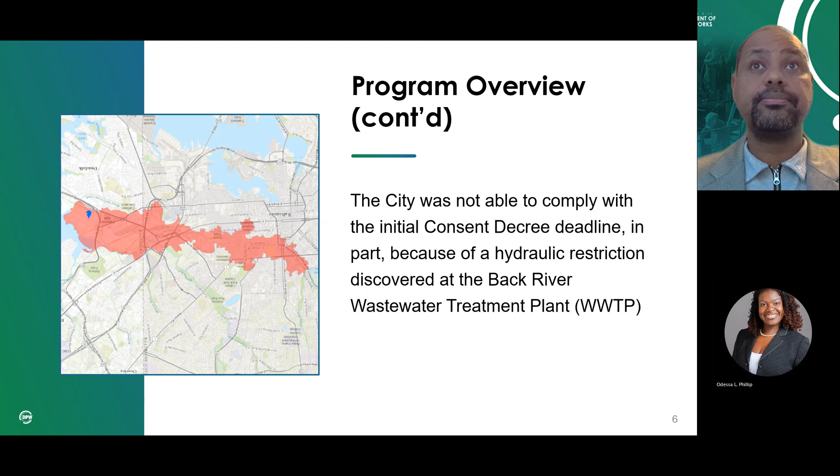So on October 10, 2017, a modified consent decree, MCD for short, was filed with the U.S. District Court. This modified consent decree established two separate phases. The phase one deadline was January 1, 2021. We are happy to say that we are essentially complete with phase one, with the exception of two projects that were delayed due to extenuating circumstances. And within this phase one, there were various projects to rehabilitate the collection system and reduce and mitigate SSOs.

Phase two will begin shortly, is in process, and is slated to be complete by December 31, 2030. And this also will provide additional reduction in inflow and infiltration, or I&I, while also upgrading the hydraulic capacity of our system. The project team for the MCD within the Department of Public Works, as you can see, is fairly extensive. These are the offices and the divisions that all play a part in making sure that the city of Baltimore is compliant with the MCD.

There are various program elements of the MCD, commonly referred to as paragraphs. What you see on the screen here are the key paragraphs or elements of the program. There are a few that I will highlight. The vast majority of the activity within the MCD is within paragraphs 8 and 9. Paragraph 8 is the elimination of SSO structures. Paragraph 9 is where a lot of the design and construction projects to eliminate SSOs are laid out or stipulated.

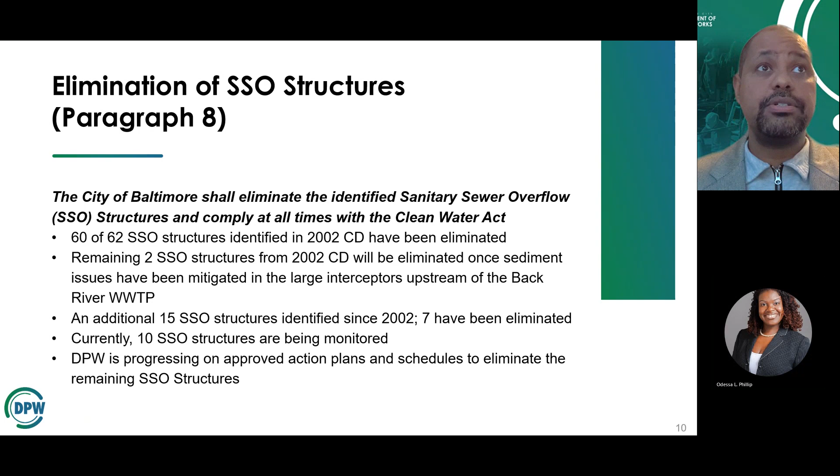So over the past 12 months, this is what we have been able to accomplish. The cleaning of the interceptor I just mentioned has been ongoing, and once this cleaning project is complete, SSO structures 67, 72, 152, and 154 will be mitigated/eliminated. It is very important to note that this cleaning project has been very active over the past 12 months.

Over 1,200 tons of debris and material have been removed from these large interceptors across a span of over 7,000 linear feet. So every debris, every collection of materials and hard packed sediment that we're able to remove directly translates to providing additional effective capacity in these interceptors.

We have also in the past 12 months begun post-construction flow monitoring, or PCFM, on SSO structures 135, 138, and 139. The elimination of these SSO structures is dependent on a project, Sanitary Contract 940, that we completed in July 2022. Since the completion of that project, these SSO structures have not been activated, so that is a very good sign that this project was successful in achieving its objective.

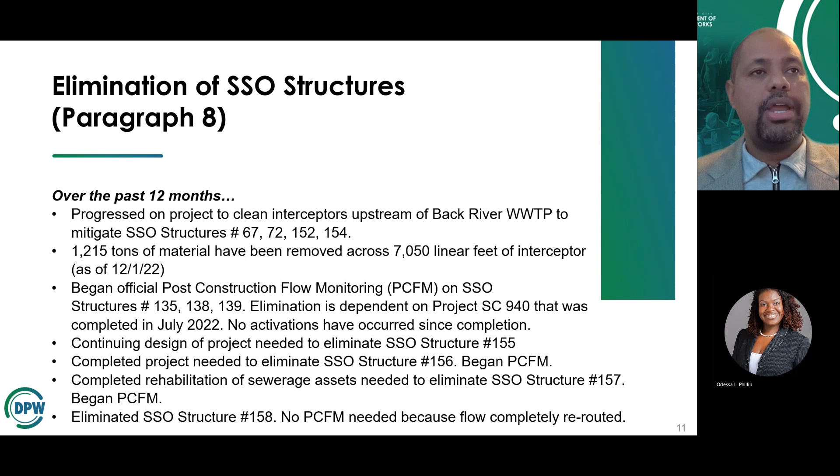We have also been continuing over the past 12 months to finalize the design of a project to eliminate SSO structure 155. We also completed a project necessary to eliminate SSO structure number 156 and have already begun the PCFM. We completed the rehab of additional sewer assets needed to eliminate SSO structure 157 and have also begun the PCFM there. And finally, in the past 12 months, we eliminated SSO structure 158. This particular structure did not require PCFM, as we were able to completely reroute the flow.

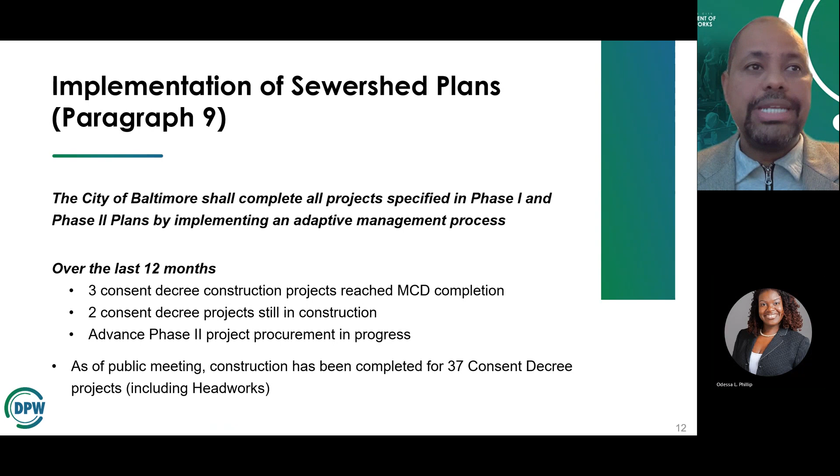The next key paragraph is paragraph number 9, implementation of sewer shed plans. Again, as I mentioned, this paragraph mandates the execution of various construction projects, and over the past 12 months, 3 consent decree construction projects reached their milestone or their completion date. 2 construction projects are still in construction due to extenuating circumstances, but we've also been able to advance some phase 2 projects in these past 12 months through an early procurement process. So as of today, construction has been completed for a total of 37 consent decree projects, including the headworks.

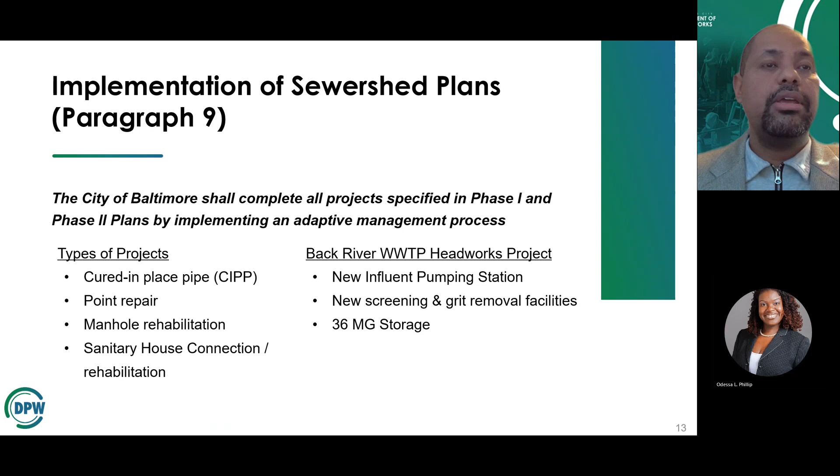The types of projects that are implemented for paragraph 9 include cured in place technologies, which is essentially, within a pipe that is deemed to be leaky or has an issue of I&I, sliding a sleeve through that pipe and renewing the life of that pipe through a cured in place pipe material. Also, point repairs are conducted, manhole rehab, as well as sanitary house connections to individual services.

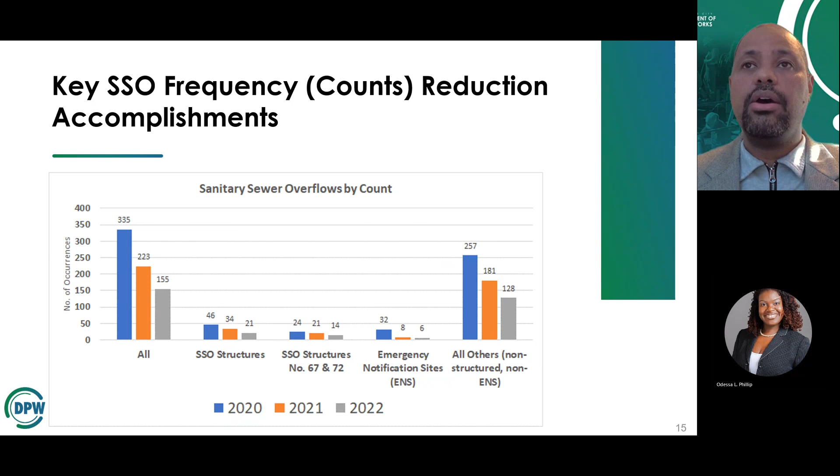So again, over the past 12 months, in paragraph 9, continued the implementation of the PCFM, and also continued the necessary analysis that will result in the completion of our phase 2 plan, which we will be submitting to the regulators this month.

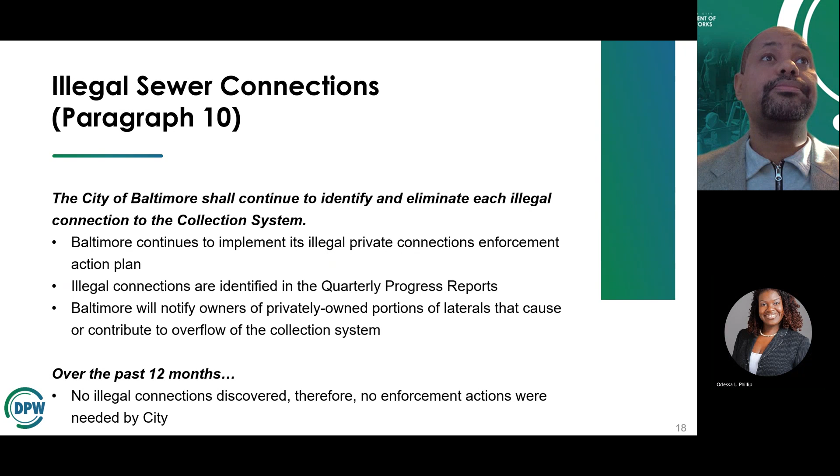Moving on to paragraph number 10, this is the paragraph that calls out the identification and elimination of the illegal connections in the collection system. Over the past 12 months, there were no illegal connections that were discovered, therefore, no enforcement actions were needed. Paragraph 11 is specific to the pumping stations, the inspection, repair, and rehabilitation of these pumping stations. Over the past 12 months, there were no overflows or no near misses that had to be reported.

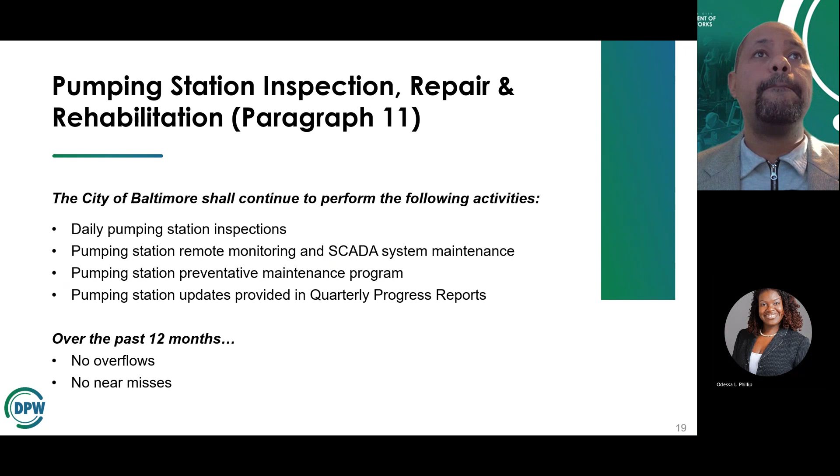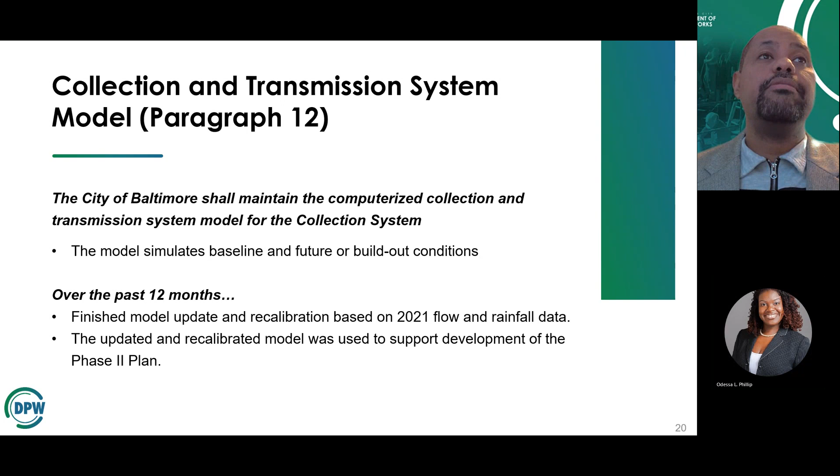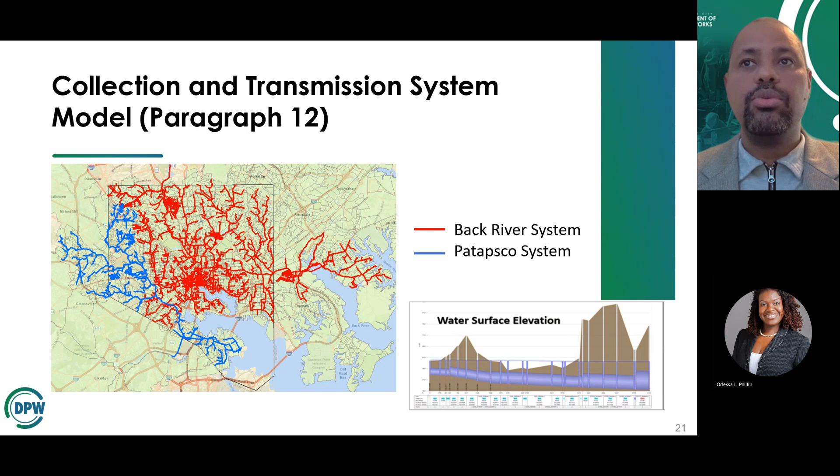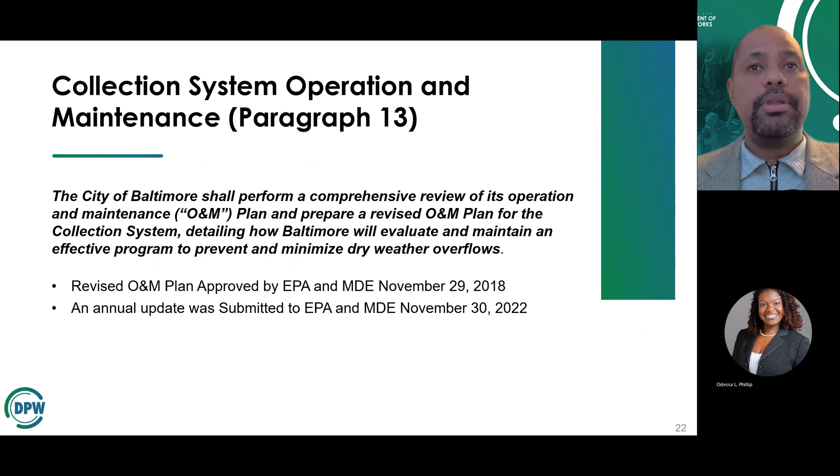Paragraph 13 is focused on the collection system operation and maintenance. And this program, the O&M program, is critical for the city to ensure that a lot of the distributed SSOs that I mentioned earlier are addressed. And we have a plan that is required to be updated on an annual basis. So over the past 12 months, we submitted to EPA and MDE the annual update for the O&M plan. We also publish on the website and submit to regulators the progress report for the operation and maintenance program.

In the past 12 months, 2.1 miles of sanitary sewer pipes were cleaned. Fats, oils, and grease, or FOG for short, was treated. 8.3 miles of pipe were treated for FOG, and 6 miles of pipe were treated for root intrusion. Again, these are all critical ongoing activities that the city is engaged in to help to reduce the occurrence of sanitary sewer overflows in the system.

But again, this is very critical for us to perform, but also in partnership with the public, so that various components to the sanitary sewer flow, such as the flushable wipes and grease and other things that contribute to blockages and issues are dealt with. And so there's a public education component to what we do to perform this O&M. Finally, we have a robust program that inspects and in some cases enforces grease control from food service establishments. And throughout 2022, over 1,600 inspections were conducted at these food service establishments.

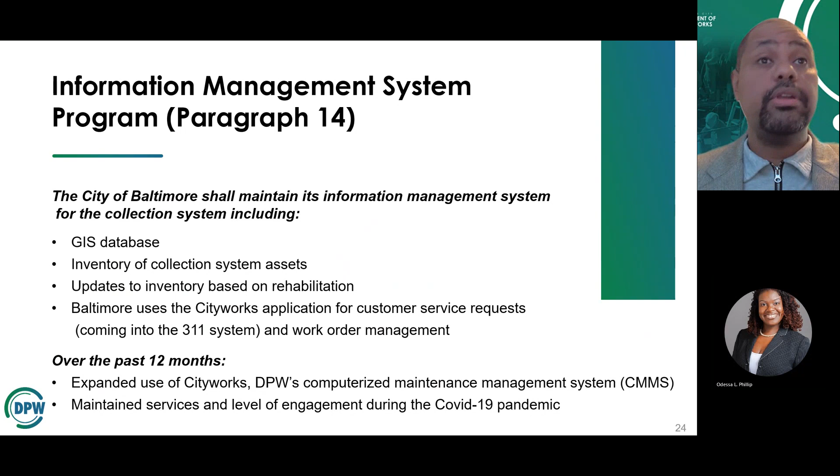We also use a computerized maintenance management system, or CMMS for short, that is used for the execution of work orders. And CityWorks is an industry standard that the city has been using for several years now. And in the past 12 months, we have expanded the use of CityWorks and maintained a level of engagement even during the COVID-19 pandemic.

Paragraph 15 is specific to addressing sanitary discharges of unknown origin, or SDUOs. And over the past 12 months, let me back up. The SDUOs are discharges to the storm system, which is separate from the sewer system, where it is unclear or unknown where that sewage source is from.

So once these SDUOs are identified, there is a process for source tracking. And then once the source of that discharge is identified, there is a process for abating it. And so over the past 12 months, 10 SDUOs were discovered, 6 were abated, and 12 from the previous year were also abated. So we have 4 SDUOs outstanding.

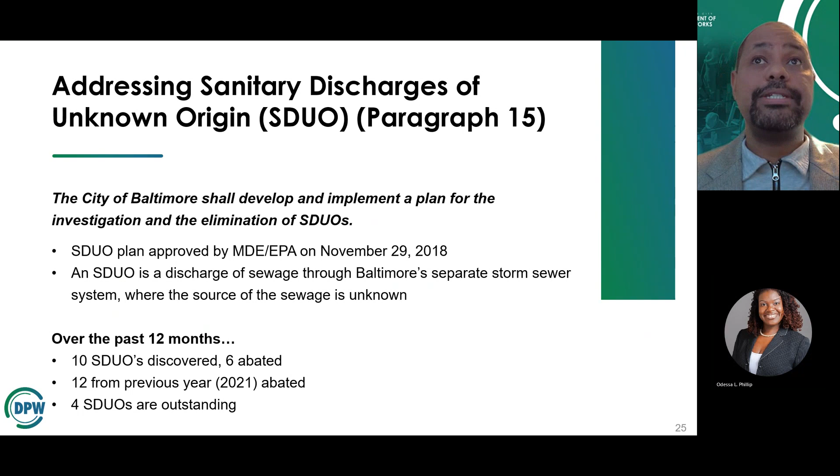Paragraph 16 is for the revised emergency response plan. And this ERP also includes a requirement for annual training for DPW O&M staff. And that training was implemented. And we are currently in discussions with the regulators for some final punch list items, if you will, to the ERP, so we can get final approval. And this revised ERP was submitted on September 15 of 2022.

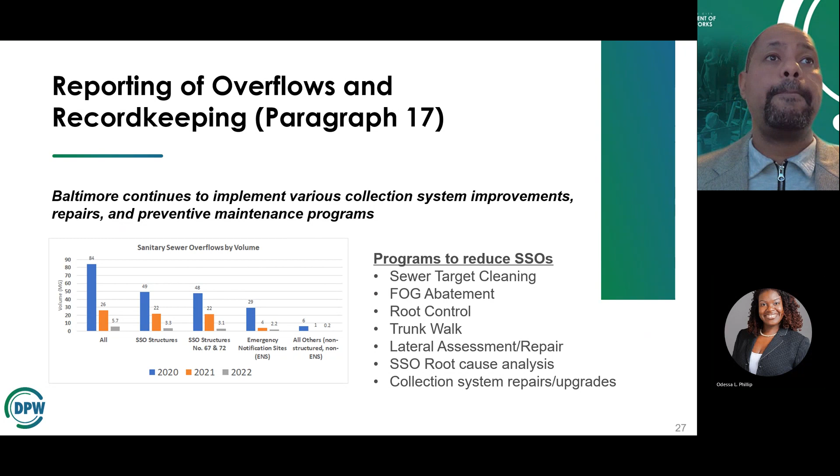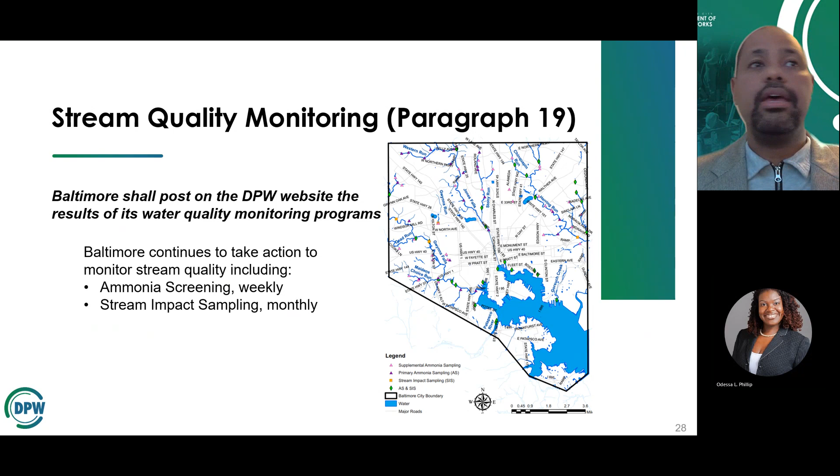Paragraph 19 is specific to the stream quality monitoring program that we have throughout our system. And the data acquired from the sampling, whether it's the ammonia screening, which is done weekly, or stream impact sampling that is done monthly, that data is posted on DPW's website for trending and record keeping.

This program in 2022 was comprised of 12 scientists that conduct routine sampling and analysis. So 126 stations are routinely sampled throughout our tidal and non-tidal systems. 575 samples were tested for bacteria, along with ammonia screening samples and the SSOs that we mentioned in the earlier slides.

Paragraph 20 refers to the review and approval of all deliverables. We have a website. As you can see, the URL is at the bottom of the page that allows the public to access the deliverables that are submitted to EPA. The phase 2 plan, as we mentioned earlier, will be uploaded to the website for public comments. So the public can sign up. Anybody can go to the website, sign up to receive regular consent decree related notifications throughout the year.

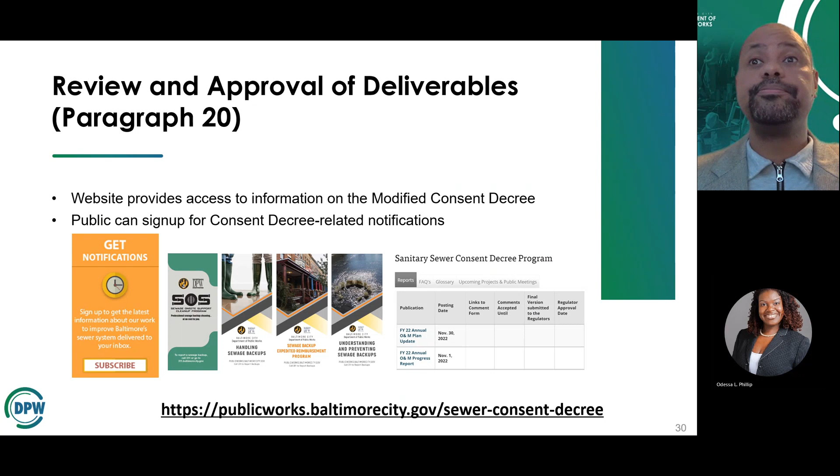One component of our program that is not mandated or not part of the MCD is our small business development program. This is a successful program that we have been running now for 7 to 8 years. The SBD program is focused on minority and women and small businesses, ideally small businesses that are located here in Baltimore. And this program is comprised of a 10 to 11 week training that helps entrepreneurs and small businesses to learn how to be competitive in the market, and particularly how to win contracts and execute and implement contracts for the City of Baltimore Department of Public Works.

Over the past 7 years, we have graduated over 350 firms, and over 100 firms through this program have become Minority and Women Business Enterprise Certified through the City of Baltimore's Minority and Small Business Office. 60 firms have been pre-qualified for $50,000 to $2.5 million projects, and over $4 million in contracts have been awarded to graduates of this program. 2022's class was successfully completed over the past 12 months, and the new class will begin in the fall of 2023.